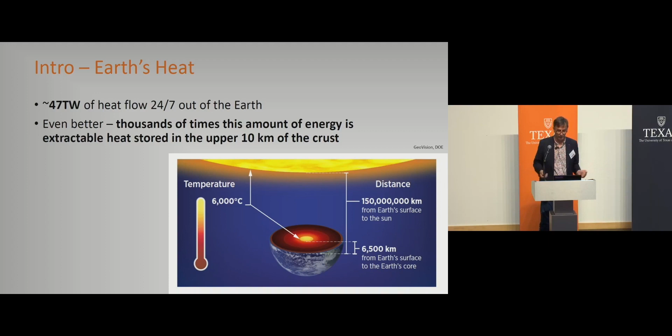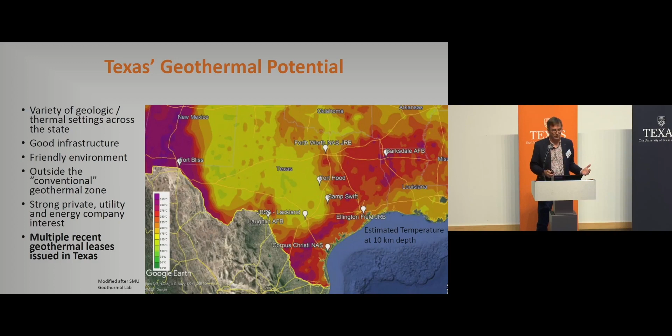So plenty of uses. And actually, when you get down to it, generating electricity with geothermal heat gets most of the attention. But when you're doing that, you're typically maybe 15% efficient overall in converting heat into electricity. When you're using it directly, your efficiency is like 85% or better. So if you really want to immediately lower carbon, offsetting dirty electricity production with direct use heat actually saves you more carbon than generating electricity directly from geothermal heat. So an interesting fact to keep in mind.

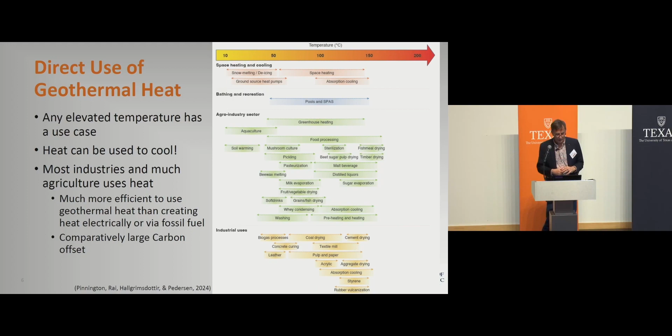So when we formed Sage about 3 years ago, we were focused on geothermal, but we got out to the field very quickly because we wanted to prove our technologies, and we discovered in the field testing that we actually had a perfect energy storage solution. So I'll be talking mainly about energy storage today.

So the first thing that you should know is pumped hydro storage, even though it doesn't get a lot of media play, actually represents about 90% of the storage around the world. And that's because it's so simple, and it uses equipment such as a Pelton turbine that is really simple, low maintenance. And Pelton turbines have been around since the late 1800s. So what we're doing is very similar to pumped storage hydropower, except we're going deep in the earth. So we call it upside down pumped hydro.

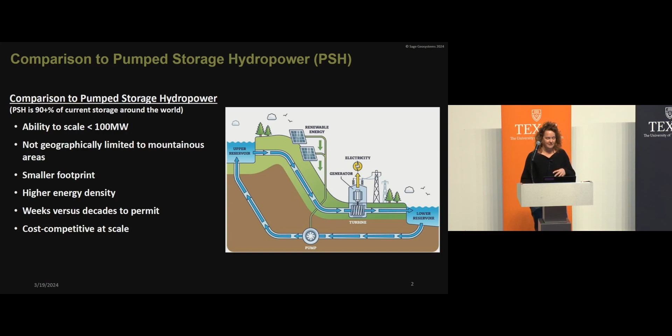So how do we do it? We drill a well. We're targeting a depth between 7,000 and 12,000 feet. We're looking for a formation characteristic that is the opposite of oil and gas, and it's the opposite of most geothermal systems. We want low permeability to no permeability rock, and we don't want any kind of natural fractures that would give us a secondary permeability.

So we drill the well, we create a fracture in the rock, and then what we do is we use the electricity when the demand is low to power an electric pump to pump water into the fracture. It tends to open the fracture up like a balloon, and then you have a pressurized system where you can store that pressurized water until the energy demand peaks, at which time you can open up the surface wellhead valves,

and that fracture is wanting to naturally close. And when it does, it will jettison the water to surface. You put it through a Pelton turbine, so we also use a Pelton turbine. You spin the turbine, which spins the generator, and you generate electricity.

So we did a commercial pilot about 1 year ago in Starr County. We have a test well there. And we were able to demonstrate a few things. One is we can do long duration storage, so if you think about 4 hours to 24 hours. We can also do load following, where we let all that water out of the fracture pretty quickly. We demonstrated a round trip efficiency between 70 and 75%, 3 megawatts per well, assuming 9 5/8 inch casing. We can get more with bigger casing, but for this well it was 9 5/8.

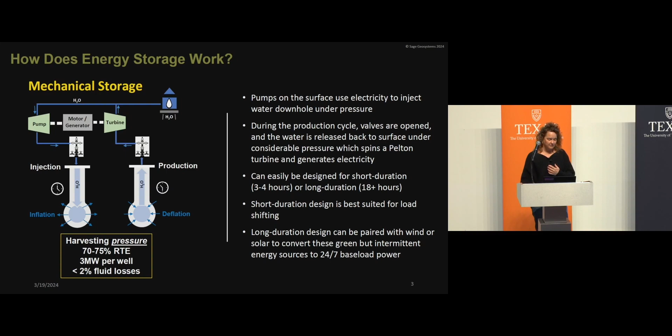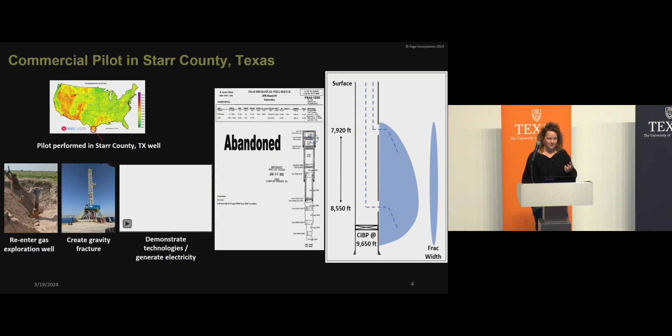So again, these are pictures from our commercial pilot. What we did is we did about 50 or 60 pump-in flowbacks, and we were measuring flow rate and pressure. And from that, we were calculating what the capacity was. The picture didn't show up, but we had a Pelton turbine out there where we were actually generating electricity and running some of the equipment on location.

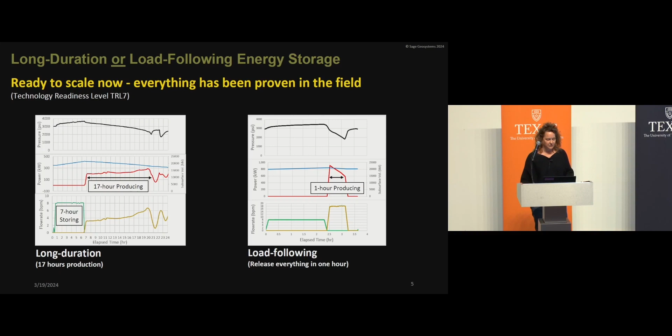The other one represents, if you've got a hot Texas day, and you guys know the electricity peaks between 4 and 7 p.m., we can release all of the water in a shorter period of time to meet peak demand. So that's what we were trying to demonstrate with these 2 particular cycles.

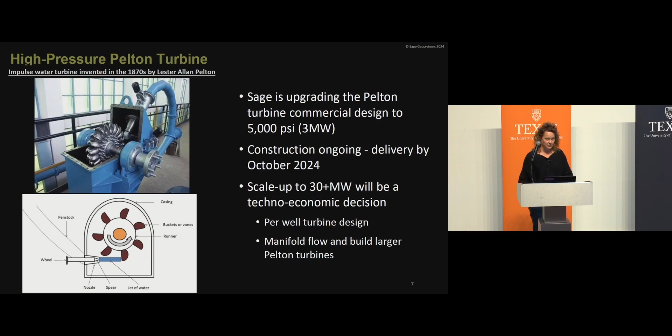So we're moving towards our first commercial facility at the end of the year. In December, that means we'll be pumping water and generating electrons. And one of the critical path items is that we have to build a high-pressure Pelton turbine, because there's not a mountain high enough where you would need a 5,000 PSI turbine. But we're going deeper than you can go high, so we're having to build this turbine. We're working with a company in Washington State, and it is actually in progress.

This is an artist rendering of a 10-well, 30-megawatt system. So again, we get 3 megawatts per well. You're looking at 5 acres for the well site. And then we'll need water storage, and depending on the duration, we'll need another 5 to 10 acres. So a total of 10 to 15 acres. So a relatively small footprint for an energy storage facility.

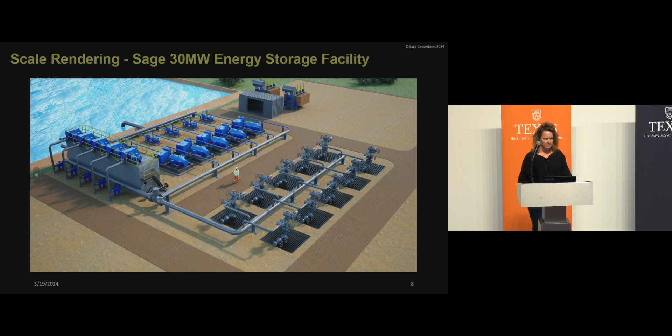And on cost, one thing I want to say is we're not trying to compete with lithium-ion batteries for 2 or 3 hour durations. They're going to be a lot more cost-effective than we are.

But when you have to start stacking lithium-ion batteries, so 4 hours or more, that's when we can beat the lithium-ion battery cost. So we're considered more long duration, so again, 4 to 24 hours.

And then just real quickly, because I know I don't have much time, I do want to say that our technology for energy storage segues into geothermal. So we use the same downward-oriented fracking technology. We use that same technology where we operate the fracture like a balloon, which actually, in my opinion, you're working more with Mother Nature than against Mother Nature, because as you want that fluid to come back, you're just allowing that fracture to close, and again, it jettisons it back.

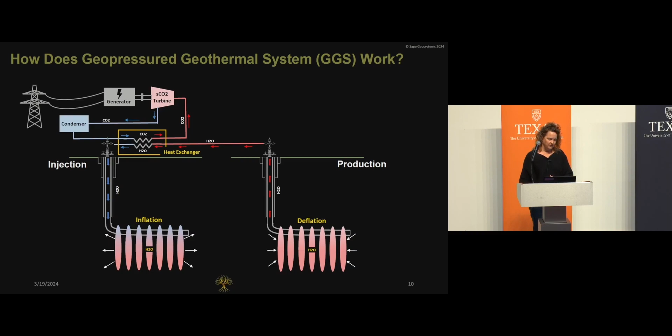And we're moving the fluid from one well to another in the surface rather than in the subsurface, and that will reduce a lot of the challenges that EGS has. So this is my last slide. This just is an overview of how we differ from EGS. So EGS, as you guys know, it's a 2-well system. You're pumping water from one well to another through a fracture.

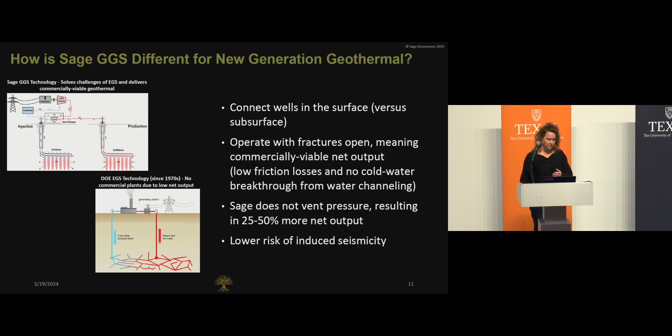And some of the challenges with that is you have to connect the wells with the fracture. There's a lot of friction when you're pushing the water through that fracture. And so by using the ballooning method, we avoid that friction. And then the last thing I'll mention is that in our systems, we actually don't vent the pressure. The pressure energy will add 25 to 50% more net output. And so we actually keep that pressure energy in the system rather than venting it.

So that's it for me, and I'm going to hand it to Malcolm. So if it's all right, I'm not good chained behind the podium, so turn my mic on if you would.

Yeah, I'm Malcolm Ross. I call myself a geothermal evangelist. That means I do anything I can to support the geothermal industry. I teach here at UT with Dr. Wisian. I teach at Rice University. I lobby at the state level and federal level. I help with startups. I do my own consulting. I do lots and lots of stuff in the geothermal space.

What I'm here to talk about more is direct use things. And what I would describe the business model that Cindy was talking about is the buy low, sell high model, right? You buy cheap electricity and then you sell it when it's high. So first, let's talk about electricity and geothermal. And I'll start with what I call cold hard facts. Maybe I should call them hot hard facts. And I'm going to end with magic, okay?

So hot hard facts. What is the price of energy in Austin? What do you pay on your bill? Anyone know on average? 12 is the average, but yeah, you're buying at a little premium. But yes, 12 cents a kilowatt hour is the average here. What you'll find out if you go to the U.S. Energy Information Administration is that less than half of that actually goes to the generator. Most of that is fees, taxes, add-ons, et cetera.

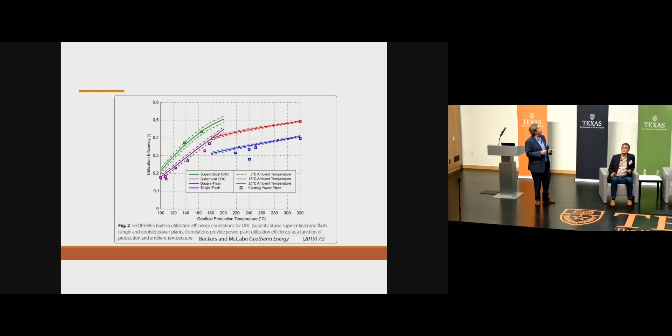But the point that I want to make is that with heat, the waste heat of one product is the input heat of another. So you can cascade these things. So you could have a perfectly good geothermal plant, and the hot water coming out of it is not hot enough to make electricity. Wow, but it's great for refrigeration and ice making. And then the waste product of that is, oh, that's really good for buildings. And then the waste product of the building is, oh, well, that's pretty good for greenhouses, and so on.

So when you're selling electrons, all you can do is sell electrons. But in this case, you can have a multiple revenue stream model for your product and your customers. And each one of those customers potentially are paying you for the heat that you're producing. You can also optimize this. So in the summertime, you may put more hot water towards one of these things, and in the wintertime, more towards another. So there's a real optimization engineering thing going on there. So that's a big advantage of direct use. And you're using 100% of the heat here, not losing 70% like you do with electricity.

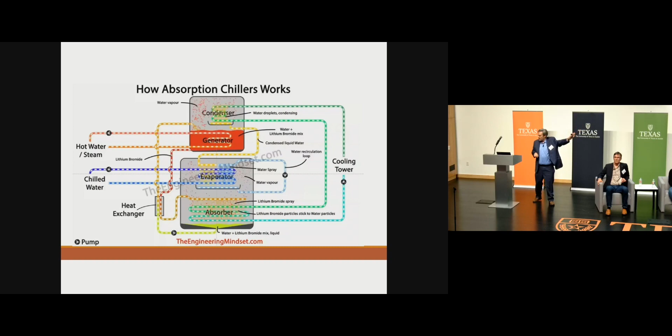And just so you know how you can do this, if you want 40 degrees F water, that's pretty cold water, but that's the building kind of mix. You can do that with a mix of water and lithium bromide, both of which are, of course, neutral agents. And if you want to get below 40, if you want to get even below freezing, wow, that's magic. You use ammonia and water. Now, ammonia can be toxic and so difficult to work with, so we don't use that as much. But that's the magic as far as I'm concerned, and that's, I think, the opportunity.

And by the way, these systems, efficiencies run 75 to 85% of the heat gets converted into cold in a single stage, and a more complicated version of these, actually the efficiencies go between 1 and 1.5. So you actually make more cold than the heat that you put in. Again, magic.

Okay, so let's talk about here, right? UT has a microgrid where they are providing cooling, heating, electricity for the entire campus. They don't buy electricity from Austin Energy unless they have to. And how do they make cooling? They burn natural gas to make electricity to turn around and cool it, right? And I would argue that an absorption chiller would be a far more efficient way to do that with a zero CO2 footprint. So that's just a little bit of magic that I want to talk about.

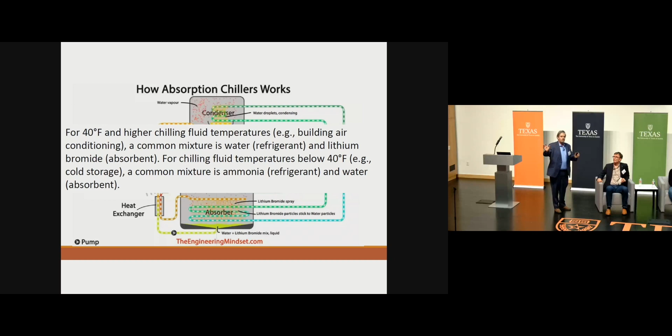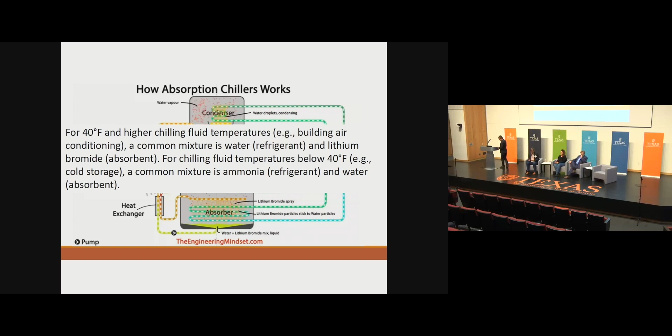And I'm sorry, I hope there's probably physics professors here to tell me I'm crazy, but anyway. Yeah. All right, so how this works. All right, here we go. Can you hear me? All right, hello everyone.

I'm Silviu. For those of you who don't know me, I was the chief scientist for the pressure pumping product line at Baker Hughes, one of the largest oilfield services companies. And then I spent 3 years here at UT in the petroleum engineering department. And just this January, I left UT and co-founded Bedrock Energy, a company to address geothermal heating and cooling of large buildings.

And so what that means. Geothermal heating and cooling of buildings is not a new concept. It started probably in the United States. The first one was in Boise, Idaho, a large project I'm talking about, in early 1980s. Famous projects around the country, Statue of Liberty in New York, many universities, military bases, single-family homes, you name it, it's everywhere, essentially. It's not widespread, and I'm going to talk a little bit about why that is. But if you think about what this means, Cindy and Malcolm and Ken already addressed how much heat we have in our planet.

So what we are doing with direct heat for buildings is actually to move the heat between the building and the subsurface. And so we are not creating heat by burning natural gas or converting geothermal energy into power and then back into heat. What actually we are doing is literally moving the heat between the building and the subsurface. And so because of that, we need energy just for moving the heat. And so this is why geothermal heating and cooling systems, also known as geothermal heat pumps, ground source heat pumps, geo-exchangers, heat exchangers, you name it, they are so efficient.

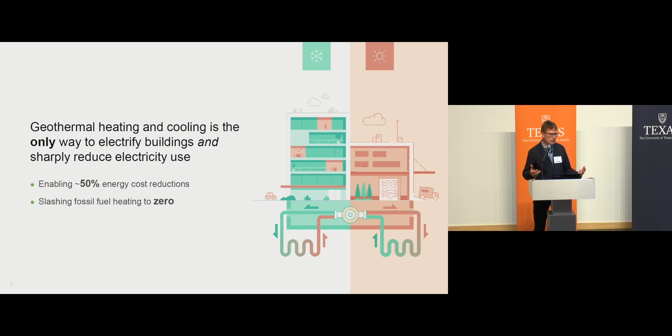However, if you look at all the large buildings in the United States, or let's say all the buildings in the world, they are responsible for literally 25% of the energy use. And so it's a very large sector, and we need to address it as such. We started Bedrock actually with the purpose of decarbonizing buildings like this one. So a very large building, somewhere in a dense urban area, where the current technologies from oil and gas are not accessible. And so if we want to retrofit a building like this to geothermal heating and cooling, we'll have to address all the problems of bringing the drilling technologies from oil and gas literally here next to it, and then drilling hundreds of boreholes probably for a building this size, and then connecting it to the HVAC system of the building. It's a lot of work.

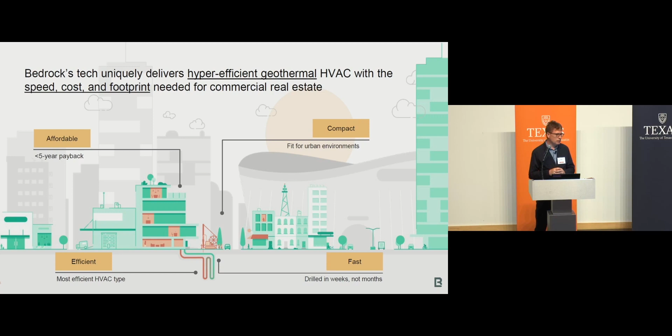And so the way the industry works today, and I'm happy to elaborate about this later, is that if you want to do a system like this in a building like this, you will need to involve currently probably 4 or 5 companies. That means a very slow process, very expensive, and probably you will have to deal with different parties for maintenance and for making sure that it's working to the specifications that you want. Yes, you will lower your energy bill. Yes, you will decarbonize your building by probably 90%, depending on what study you are reading. But the technology exists today.

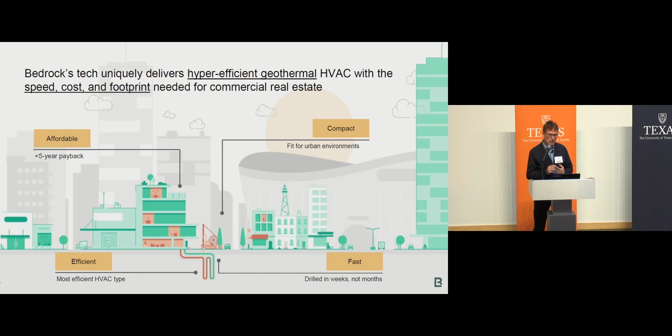And so to scale it up to any building in the United States, and especially large buildings like this one today, we will need to develop technologies that are affordable, compact, efficient, and fast. And so this is how we started Bedrock. When we talk about how we can scale up geothermal heating and cooling to any building in the United States, what we realize is that all other geothermal companies out there are addressing one problem at a time.

So they are either project developers or technology developers and such. Bedrock is actually a vertically integrated company. Our counterparts from the oil and gas industry are companies like Baker Hughes, my former company, Schlumberger, Halliburton, Weatherford, you name it, right? And so what we are doing is literally developing technology in one place, and then we are drilling ourselves, we are installing the systems ourselves. We are one shop for everything.

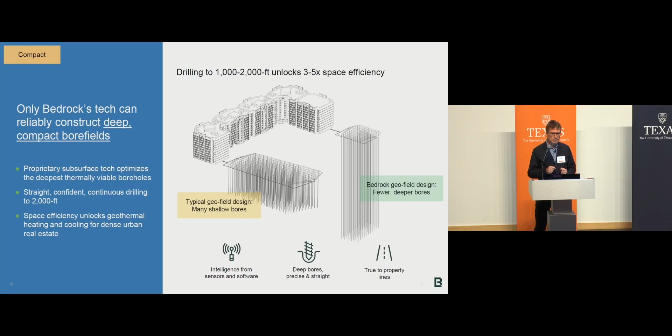This is a step change, but where we are going to get with all that is that once we can prove that not only we can drill deeper, we can drill faster, but it's about actually how we execute a project as well. So our vision is to come up with all the knowledge from oil and gas, from the tech industry, and from real estate. And so this is why we built a very diverse team with a lot of different expertise and experience. And we bring everything together, we package it all together. And so the intention here is not to do every building the same way, to drill the same way, and to execute projects the same way. We have to come actually with a way to address the exact heating and cooling needs of each building, and each project is going to be predictable.

So how are we going to do that? Coming from oil and gas, we don't produce oil and gas from any location. We have to do exploration. We have to do a lot of simulation to understand exactly where we can produce oil and gas and how much. So we really characterize our subsurface conditions, and we understand exactly how we produce, for how long to produce, right? The same thing we are bringing into the geothermal heating and cooling industry.

So without that predictability, without that consistency of executing projects for geothermal heating and cooling, you pretty much are going to have a payback period, and I'm saying that because we are in the business school here. You can have a payback period anywhere between 5 years currently all the way to 26 years, University of Illinois at Urbana-Champaign. And so that's actually the big blocker for executing and scaling up geothermal heating and cooling projects. I'll let Ken now take it over. Thank you very much.